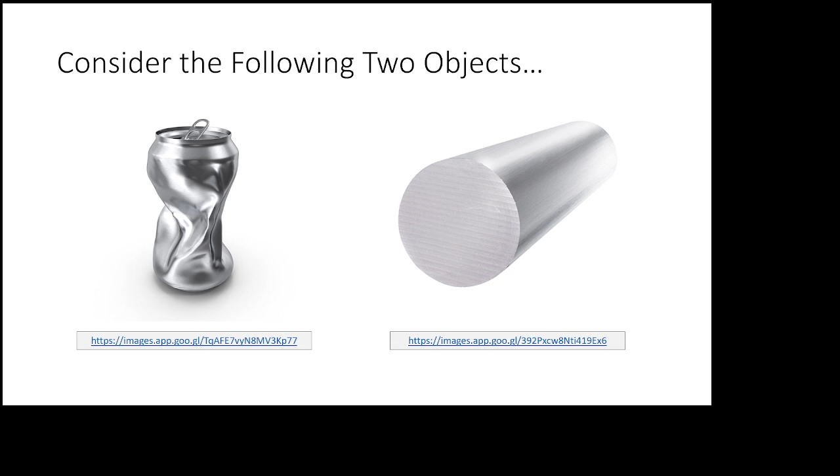Okay, you're both basically saying the same thing, and I want to add a little precision to it. What we're talking about ultimately is the problem's geometry. Let me give you a mathematical example, and maybe I'll draw a little bit on the board here. Let's see if my marker works. Okay, yay, my marker works. Okay, so let's keep the problem simple. Let's use aluminum since we're in that realm.

Let's say I have a piece of aluminum and I yank on it, and I keep on yanking on it. Let's say it's a pretty thin piece of aluminum. And let's say when I get to a load of 100 pounds, that aluminum rod snaps in half.

Okay, now let's look at a different scenario. Let's take a different aluminum rod and double the size of that new aluminum rod. How much load do you think it would take to snap the second rod, if I doubled the size? Just basic relation, what do you think?

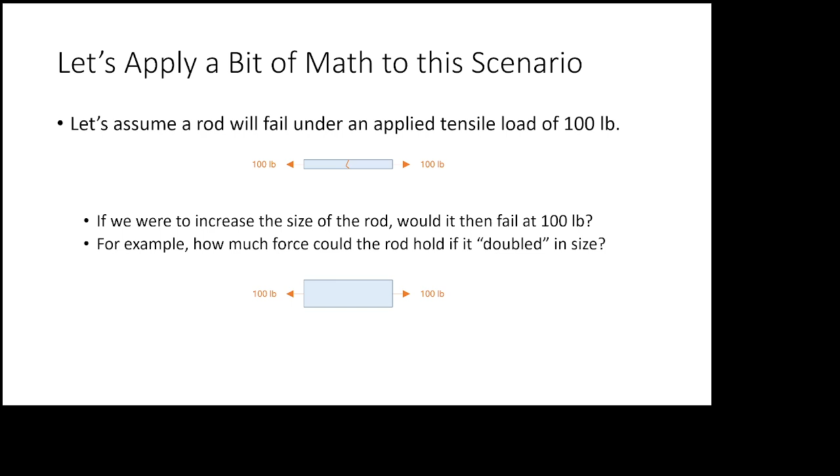200 pounds, right? So what we're talking about here, if we wanted to define this a little more rigorously, is that there is a relationship between the response of a given object and its geometric properties, right?

Okay, so I want to softly introduce one of the most fundamental terms in this course, which is the concept of stress, okay? I propose that if we're really starting to talk about the behavior and performance of engineering systems, it's not so much the forces they're experiencing, it's the stresses.

I propose that in this example, if I take an aluminum rod and it takes 100 pounds for it to fail, and if I double the size, it's going to take 200 pounds to fail. It's not the load, and it's not the properties, it's the resulting stress, okay?

Now, we use the term stress in this course, and I want to differentiate it from a term you're probably more familiar with. I'm going to be talking about stress. You're probably thinking of pressure, okay? You're probably thinking of pounds per square inch, force per square inch, kilonewton per meter squared, and what have you. To be clear, they're measured in the same units.

Pressures can be in PSI just like stresses can be in PSI. The difference from an engineering perspective is that pressures tend to relate to fluids, liquids and gases, whereas stresses are for solids and what have you. So I want to make sure we're differentiating between stresses and pressures right off the bat, because this is a course about stresses.

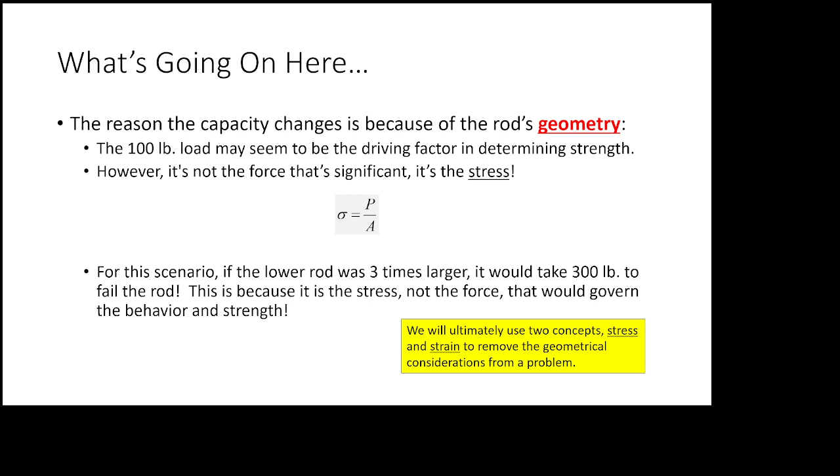Does that make sense? Okay, just want to make sure the ideas are in place. Now, let's complicate things a little bit.

I want to illustrate what's going on here with these two images. First off, what I have are aluminum rods and wooden dowels. For the sake of discussion, we're going to assume their geometrical properties are identical, okay? Same cross-sectional area, same length, same everything. Which do you think is stronger, the aluminum or the wood?

I'm asking, what do you think? The aluminum. Now, the short answer is that's correct, okay.

But my point is, let's talk about what's going on here. I think I've removed the geometrical issue from this scenario because the geometries are the same - same cross-sectional area, same length, etc. So if I take 100 pounds and apply it to the aluminum rod, and 100 pounds and apply it to a wooden dowel, I'm going to get the same stress. But I would argue the wooden dowel is going to fail first. There's something about the wooden dowel that's just weaker, right?

Yes? If it would bend, like aluminum would bend, or metal. Well, we're going to talk a little bit about that later on, how alloy type materials like metal will undergo yielding and fracture. Wooden materials will probably split. Concretes or ceramics will crack, and so on and so forth. Those are very important points.

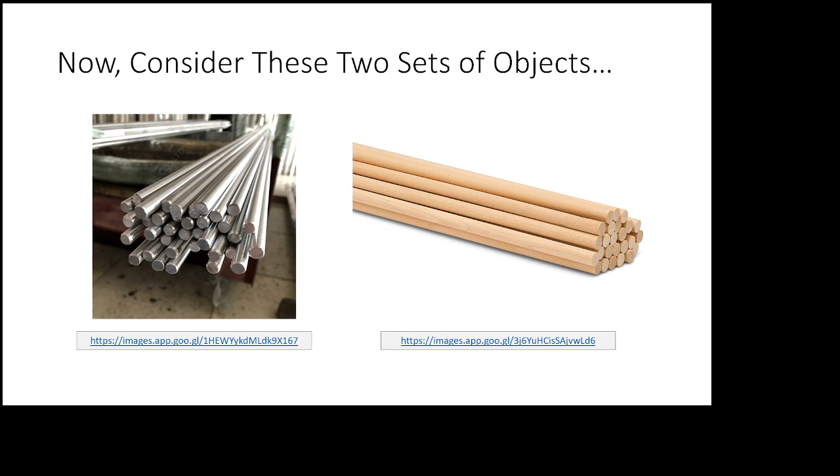But it got harder as it progressed because there's something about these material properties that make it more difficult. It's easier to fail a wooden dowel than it is an aluminum rod. It's because there's something about the material properties.

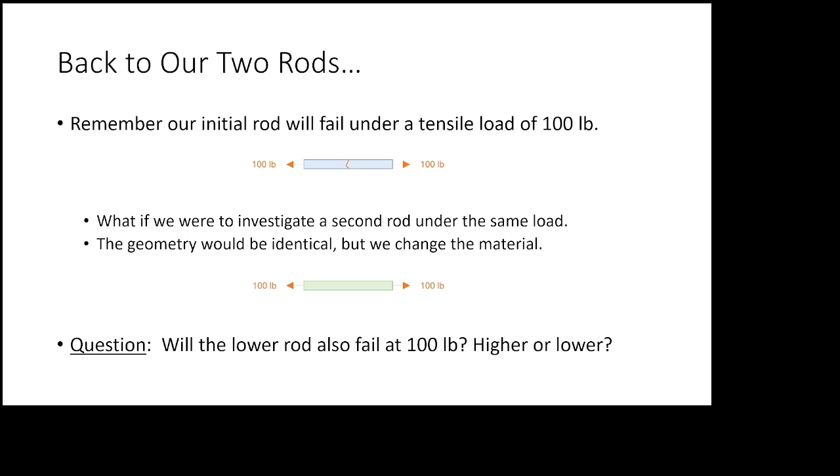If I go back to the mathematical perspective - if I take this aluminum rod and apply 100 pounds to it, but what if I keep all the geometry and the loads the same, but change the material properties? Does it behave the same? Can it resist more load or less? Well, I don't know. And the reason why is because there are other properties associated with the situation, right?

If scenario one deals with the fact that we can remove the geometry from the situation, well, there's more to it than that. We also need to understand the inherent material characteristics. I propose that in this course, not only are we interested in normalizing response by investigating stresses and strains, we are also interested in understanding the relationship between stresses and strains.

And I propose that relationship changes depending upon what material you look at. For example, we're going to talk about linear versus nonlinear behavior later, but linear elastic behavior is akin to a rubber band, right? You take the rubber band, you load it, you let it go, it goes back to its original shape. That's elastic behavior, and for the most part, linear behavior as well.

I propose that linear relationship, that slope of the curve, changes depending upon what material you look at. Copper has different properties than aluminum, than steel, than polymers, than ceramics, etc. And so we need to accurately understand those in order to be able to assess engineering systems.

How many of you, did any of you do tensile tests in Engineering 215, you mechanical folks? Did you do a tensile test where you took a piece of steel and yanked on it?

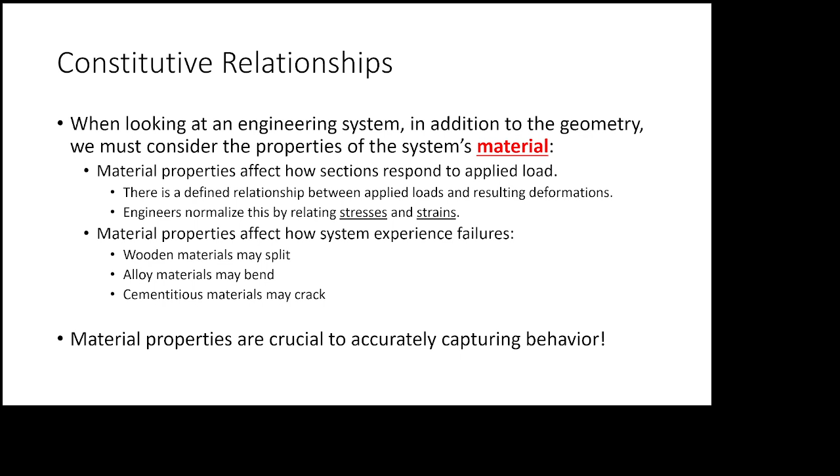Let's delve a little further. What if I changed the way I loaded it in general? What if it was the same wooden dowel or the same aluminum rod, but in one scenario I stretch it, in another I bend it, and in a third I twist it? Would you agree it's probably going to behave differently under those different conditions? It's going to be able to withstand different loads?

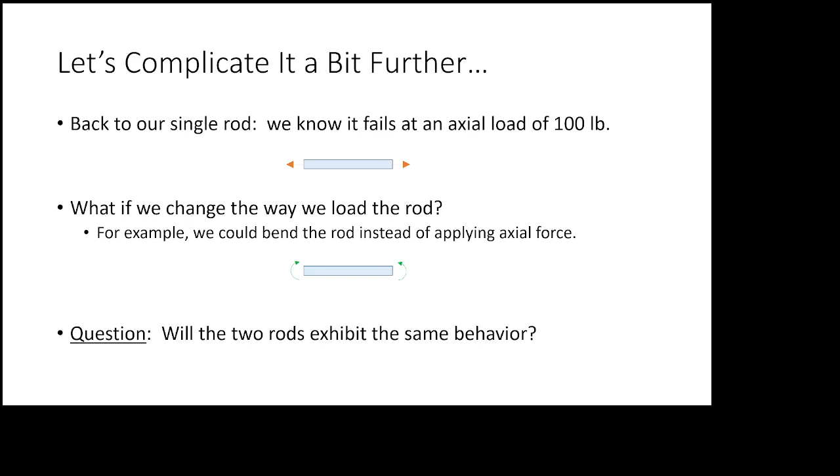That's 100% correct. And that's actually what we're going to focus a lot of our attention on in this course. There are sort of a big four stress formulas we're going to be deriving throughout the semester: the stress formulas that result from axial load, from loading along the axis, from torsion, from bending, and from shear. Those are the big four stress formulas we'll deal with throughout the semester, as well as their resulting deformations.

And we're going to see today how the end goal, the end game if you will, is really pertinent to your careers.

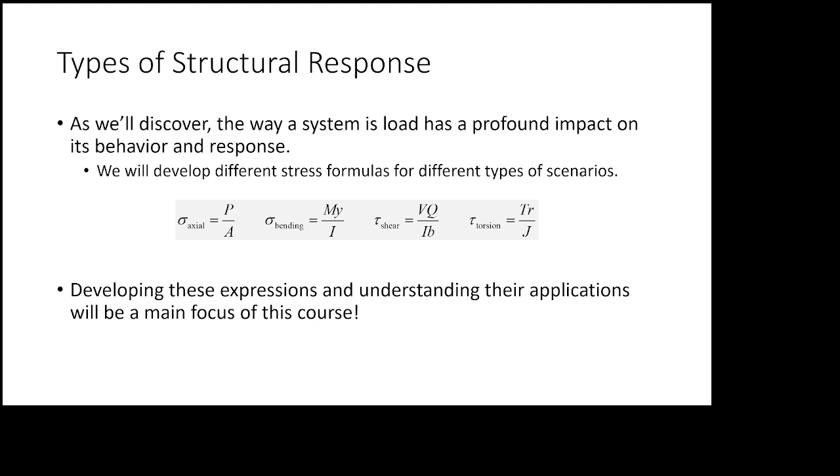We've got a couple other things we're going to discuss in this course to illustrate what we're talking about. One important thing, which we'll deal with near the end, is load orientation. If you take an element and apply tension, it tends to elongate. But if you apply compression to it, it tends to want to do this thing called buckling. Buckling is very different in terms of its behavior—it's a sudden loss in stiffness. Anything in compression, columns, components in machines and systems, very important.

Member orientation, stiffness—at one point in statics we reviewed this thing called moment of inertia. We're going to spend a lot more time with that in here because it changes response depending upon how a member is loaded. What if you have multiple stresses going on at the same time? What if you have a member you're loading, twisting, bending, twisting, all at the same time? What's the worst case stress state?

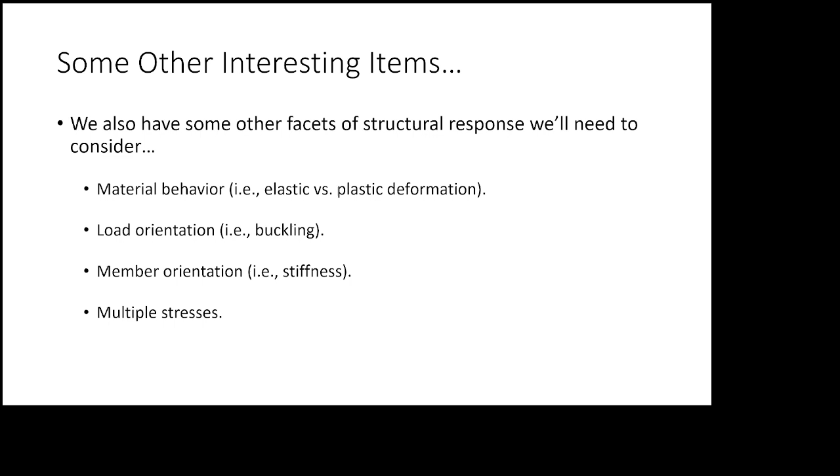Okay, and ultimately what you might be asking yourself is, who the hell cares about stresses? Why does this matter? This is going to become very clear today with some of the examples we're going to look at, because what we're going to see is why you would care, why as an engineer you would need the concept of stress to be able to assess an engineering system.

Okay, so I want to go back to Engineering 213, and if it's tough for you over here to see the slides, don't worry—I think I'm going to do this example on the board today, so it's a little easier for everybody to see. But I want to go back to statics to illustrate some of the ideas that were important to us.

One of the most—does anybody remember in statics what our secret weapon was? When we had an engineering system, what was the secret weapon we developed to determine the internal responses? Remember the samurai sword or the lightsaber, if you happen to be a sci-fi fan?

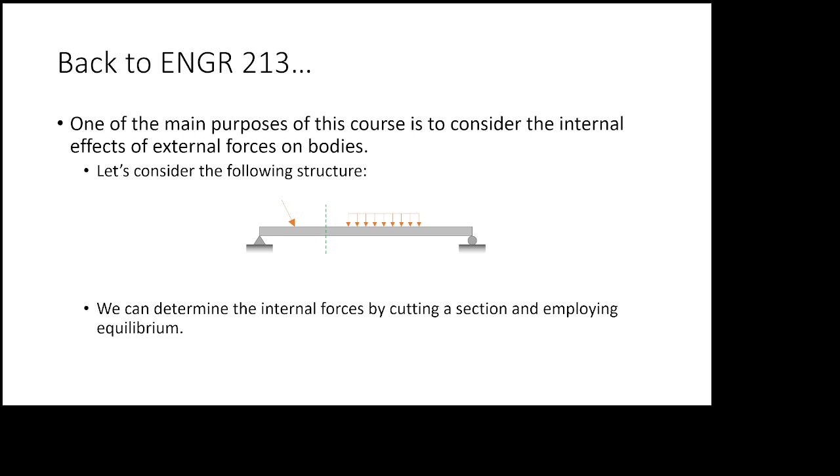Remember that? The idea is that if I'm sitting here on the table and you break out the samurai sword or lightsaber and cut through the table, that's going to result in a depleted grade on your part, because I'm going to fall and hit the ground and I'm not going to be very happy. Remember that? The reason why is because there are forces inside the table keeping me upright. So if we're dealing in two-dimensional statics land, there...

I thought that was the fire alarm. 8:30 is the time to wake up for an 8 a.m. class? What's that? Need to update the time zone and whatnot on your phone.

In two-dimensional land, there are at most 3 unknown responses inside a given element: the force in the x direction, the force in the y direction, and the resulting moment. With each of those loads, we can develop a resulting corresponding stress.

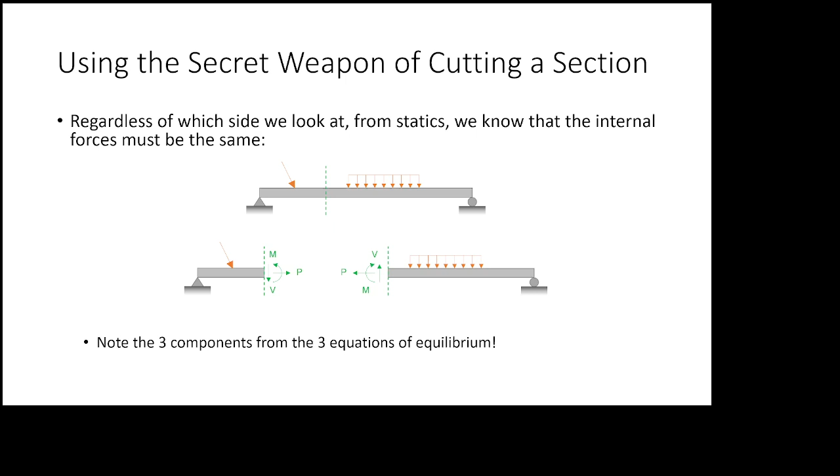That's in 2D land. If we were going in 3D land, we could get 6 resulting components. We would have the axial force, the torsion, the shears and moments in each direction, etc. For each of those components, we can develop a resulting associated stress formula.

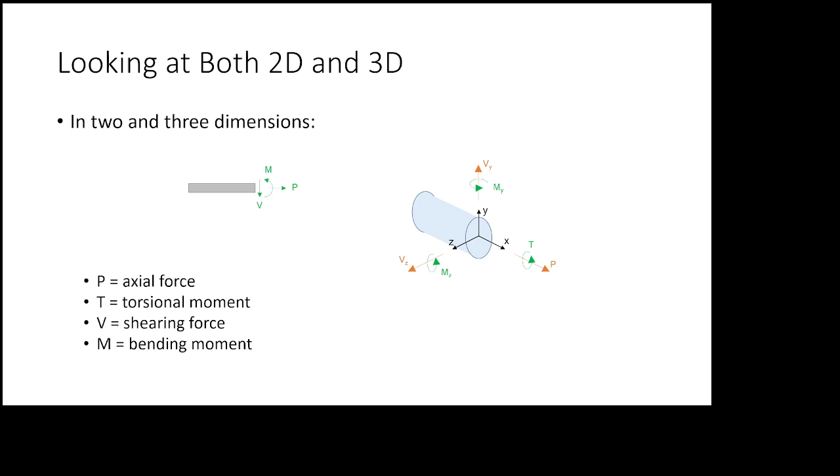We're going to begin with the most basic of stress formulas that we could deal with in this course, and those are axial stresses. I'm going to turn the light on here, because I want everybody to kind of see what I'm talking about. Oh my, that's bright.

The most fundamental stress formula that we will be dealing with is axial stress. The formula for axial stress is P over A. This formula comes from: if I take an element and apply an axial load to it, a load along its axis, stretching or pushing it, the resulting stress is defined as the load per unit area.

Now there are a couple of components you need to be aware of. This is technically a bit of a simplification of how this would really be defined, because the rigorous mathematical definition looks at a given differential element of area and says the stress for that element is the force per area, and then to rigorously get our stress, we would take the limit as the area approaches zero.

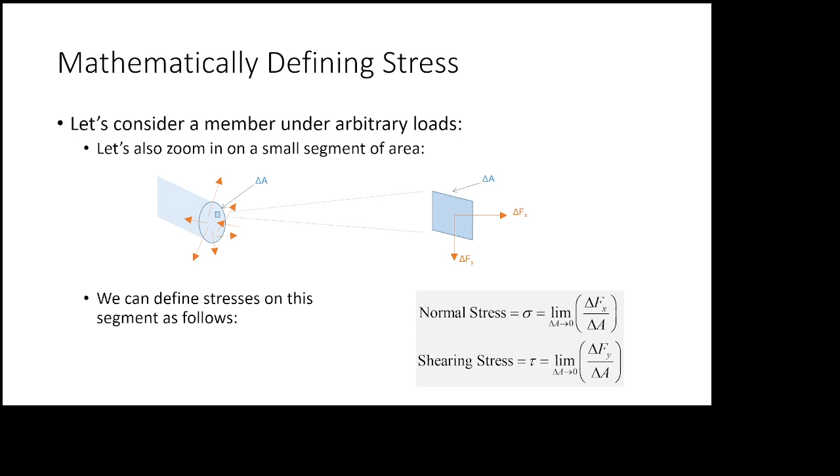Don't worry, we're not breaking out any limits in Engineering 216. I just need you to understand that ultimately what we're dealing with is an average stress, and for most cases, an average stress is more than appropriate enough for the purposes of design.

Now let's talk a little bit about units. In mechanics of deformable bodies, I've got civil engineers and mechanical engineers in the room, and it's important that you understand how to navigate both unit systems. In USCS units, we will tend to deal with either PSI, pounds per square inch, or KSI, kips per square inch. In statics, we introduced the concept of a kip, which is just 1,000 pounds.

In metric, we will be dealing with essentially newtons per meter squared. The abbreviation for that is a Pascal. One shorthand I want everybody to understand is a kilonewton per millimeter squared is a gigapascal.

That's a shorthand I want you to sort of memorize, because there will be problems where they say the limiting stress is in megapascals, and everything else is in kilonewtons and millimeters. Take that megapascals, convert it to gigapascals, it'll make your life a lot easier. We'll have some examples where we go through that relatively shortly.

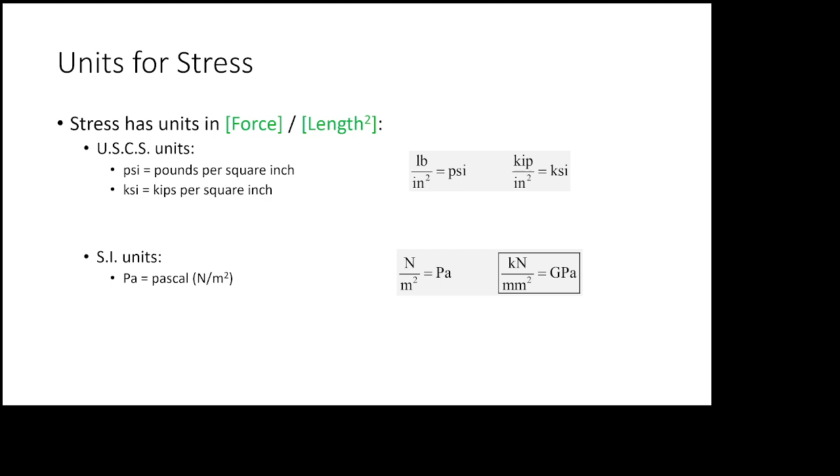Any questions? I think the easiest way to start introducing the concept of stress from a rigor perspective is to just do some problems. I want to talk a little bit about this problem, and I'm probably going to draw a bit of it up here on the board to make sure we can all see what's going on here.

I have here a two-tiered pipe system. So what I've got here is a pipe, and I've got sort of a pipe welded to that. Now in this system, I've got two different loads applied to these given pipes. We'll call this PA, and we've got right here, we'll call this PB.

I've got a series of numerical properties for the pipes that we'll deal with here in a bit. What I'm going to ask is to determine some stress conditions under changing loads: what's the stress if the load is this, what does the load need to be for the stresses to be equal, etc. Let's take this problem one step at a time and see what we can ascertain from this.

Now, hopefully everybody brought their Casio FX115 ES Plus or similar scientific calculator. I know you're like, day one? Are you kidding me? Yes, we're going to do this on day one.